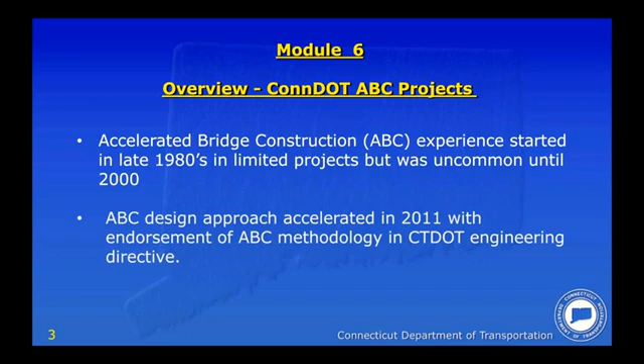So what have we done over these years for ABC project types, the quantities and types? This slide provides the data we've been able to put together. We may be off a little bit, but this is fairly close: a total of 138 projects to our best count.

And these are the project types. Prefabricated bridge elements / modular deck beams: 105 projects, which is 76% of our total ABC projects. Within this group we are also including concrete rigid frames, which may be over streams, as well as arches, and then modular deck beams.

Precast deck panels: 5 of the 138, and we'll talk about reasons why there aren't more of those. 13 projects with precast substructure components along with prefabricated bridge elements and modular deck beams. So these are 13 projects where your whole substructure, abutments, and wing walls are all precast, along with the spanning elements, whether it's a rigid frame or a modular deck beam.

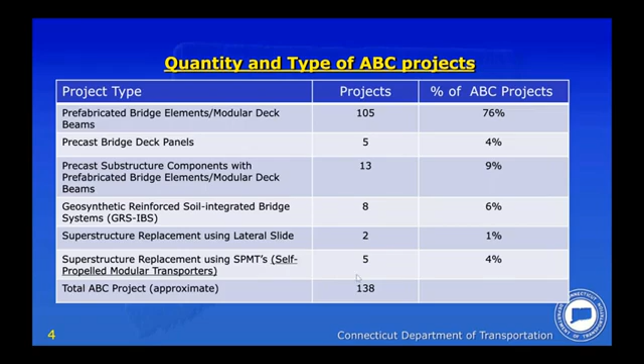One of those is being advertised right now, and the other one I'm going to speak to later in this module. There are also 5 SPMTs, where whole superstructures are moved into place either onto new substructure or existing substructure.

So, reasons for ABC use. In a master spreadsheet we compile to keep track of these projects, the number one reason for use of ABC is time savings in construction, and this is directly associated with cost savings with an ABC approach.

As we saw before, there can be significant cost savings in ABC projects as a result of reduction in overhead on the part of the state and its consultant inspectors.

Other reasons are avoiding complicated and staged construction conditions that can be avoided oftentimes with full shutdowns, and the safety improvements that go with that for work zone safety. And then lastly, the overall reduction in traffic impacts to the traveling public.

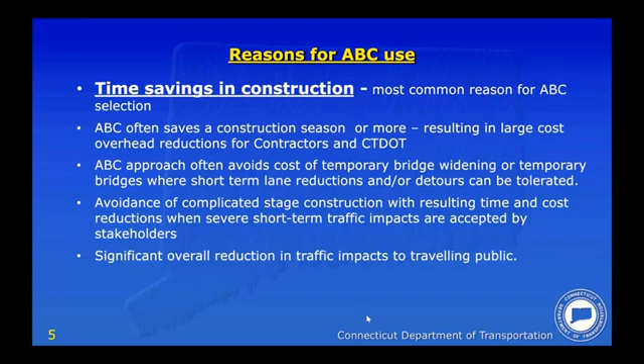I can't think of one ABC job that we put out where we had complaints back from the public over what might be fairly significant but short-term traffic impacts. The overwhelming response to our projects is appreciation that we're able to get in and get out so quickly. So those short-term disruptions with long detours are, for them, a small price to pay for a much lesser presence on the ground than some of the conventional bridge projects we've put out in the past.

So why do we have 76% modular deck beams or rigid frames as our ABC projects? I'm listing mine here in these bullets that you can see on the screen. Typically, it's due to a more cost-effective approach in replacing the entire superstructure versus redecking a bridge.

Often the bridges we're looking at in these projects are 50 to 60 years of age. They're steel deck girder spans, often with serious corrosion and poor paint, and they're in the 40 to 80 foot span range, which makes placement of modular deck beams very cost effective.

Going back to the service condition of these present superstructures, it's often more cost effective to replace the entire superstructure than it is to undertake the steel repairs that are often needed, along with painting the bridge at the completion of, say, a deck replacement. So that's basically why we've evolved in that direction, finding that replacement of the entire superstructure is more cost effective. We do life cycle cost analysis that also bears that out.

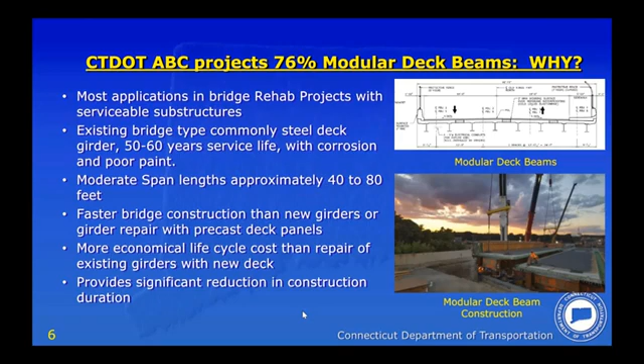So right now I'm going to just go over 3 examples. Mike has presented 2 examples here. Actually, Mike presented our deck replacement using precast deck panels in our Waterbury and Seymour projects, and we have seen also another deck replacement in our Waterford crossing of 395 over Route 85, and GRS-IBS bridge substructure construction in conjunction with a standard superstructure installation.

So this one here is a PBE, a modular deck beam example. This is State Project 35194, Old Kings Highway North over I-95 in Darien. The original bridge was constructed in 1952, and the bridge project here was to be a rehabilitation.

Through a study of the bridge condition and alternatives, it was determined that the deck needed to be replaced in any case, but the bridge had undergone a number of bridge hits because of substandard vertical clearance, and also had a very poor paint system.

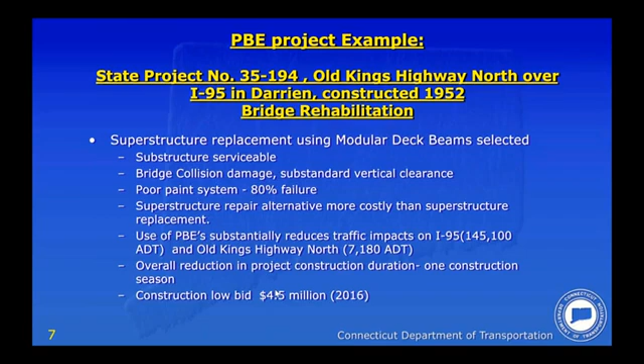So it was decided that bridge replacement would be the most advantageous solution here. PBEs were looked at using the earlier pilot ABC decision matrix, and it was found that PBEs was the optimal ABC approach to use in replacing the superstructure of this bridge. It turned out this bridge could be replaced in one construction season, the superstructure that is.

So this is a plan view looking at the proposed bridge over I-95 at this location of about 145,000 ADT of traffic.

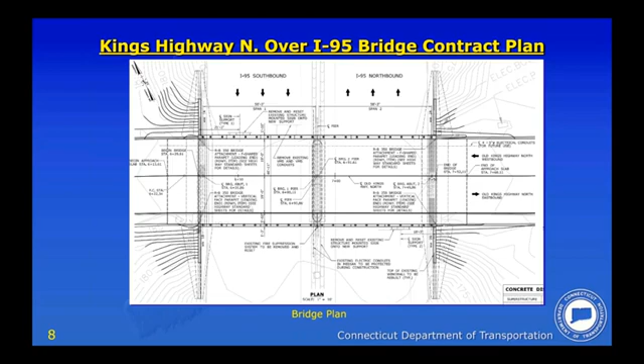Bridge south elevation looking here. You'll see the new superstructure. The substructure was stepped up to be able to raise the superstructure with a shallower superstructure to achieve design vertical clearance, AASHTO compliant vertical clearance.

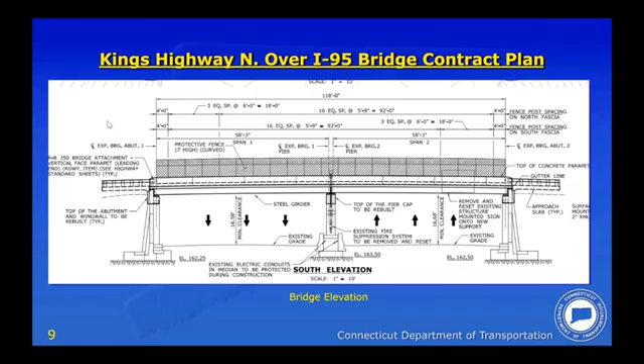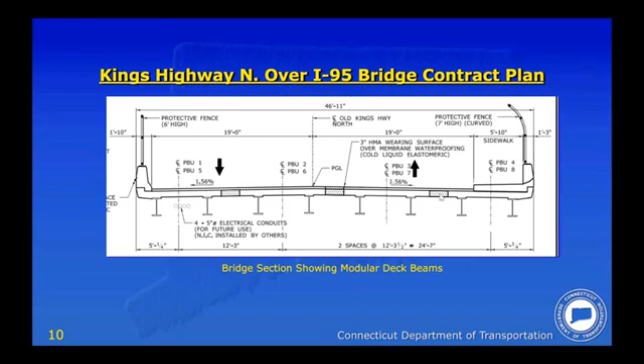Bridge cross section showing modular deck beam. You see the closure pours between the various segments here, the two girder segments. And a plan elevation showing the closure pours and the link slab construction over the center pier.

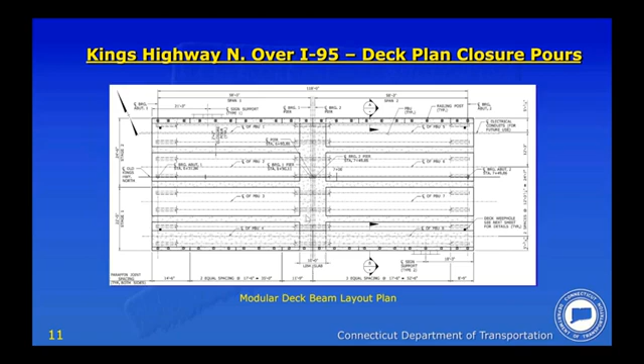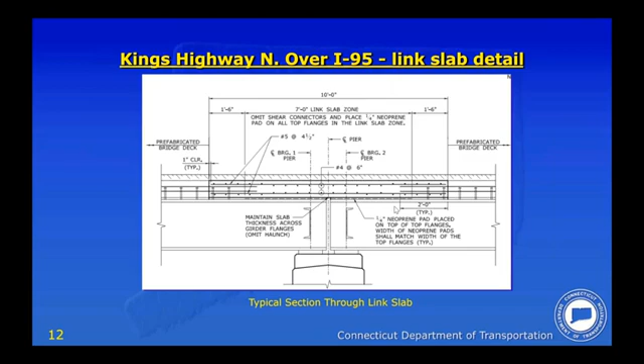Cross section of the link slab construction. So this obviously was cast after the spans were all fully dropped in place. And the erection plan showing the placement of cranes during the erection of the superstructures.

These PBEs, or modular deck beams, I'll say that these were all done during Sunday night closures, from about 10 o'clock on a Sunday night to 6 a.m. Monday morning. I believe there were 4 of these closures of Old Kings Highway allowed to make this happen.

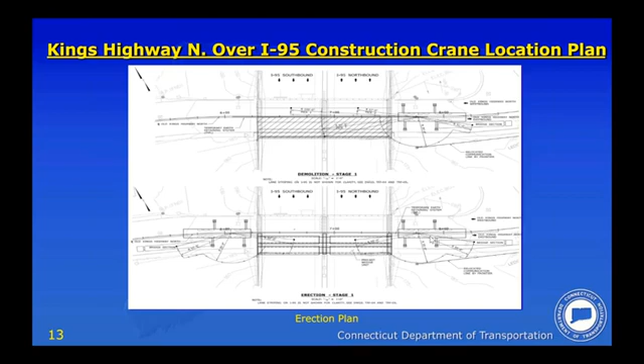Bridge 37, Route 1 over I-95 in Stamford. This was originally to have been a deck replacement project. This had been on our books for a long time.

Unfortunately, it would have required 5 stages of construction to accomplish a deck replacement over a multi-year period due to the very high traffic demands on this 4-lane span across I-95 in Stamford, which also includes a turning lane. That duration, with the traffic impacts, presented an unacceptable proposal to the town.

And this project was dormant for a little while for several years while the department worked on what to do, how to go about replacing this bridge deck.

But with the success of SPMT methodology that we saw elsewhere, and one of our own success stories that took place in Southington on Marion Avenue over I-84, it inspired our designers to look at using SPMTs to replace the entire superstructure, not just the deck, even though the steel was actually in pretty good shape in this project. SPMTs opened the opportunity to deal with this project in a much more expeditious way.

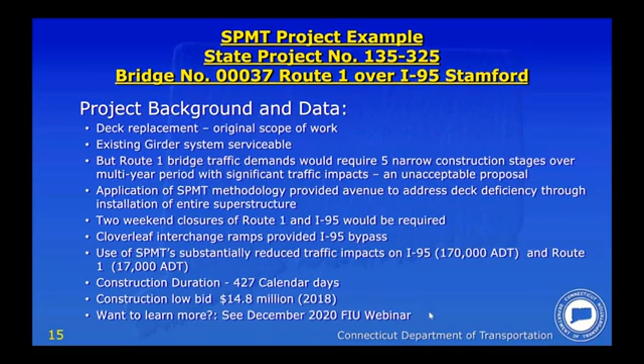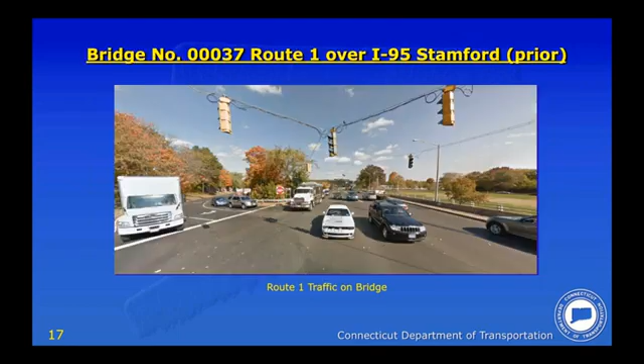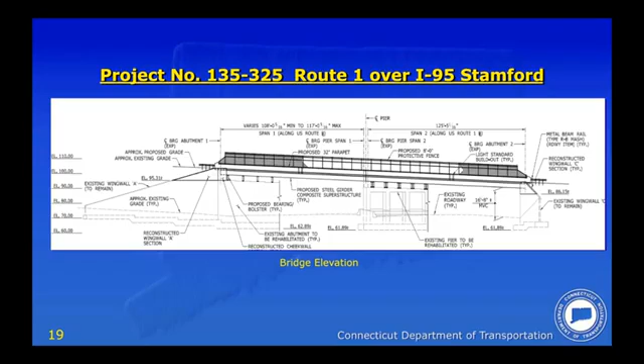A two-span bridge with a highly skewed 125-foot span 2, and span 1 ranging between 108 and 117 feet, and a cross section of the new bridge.

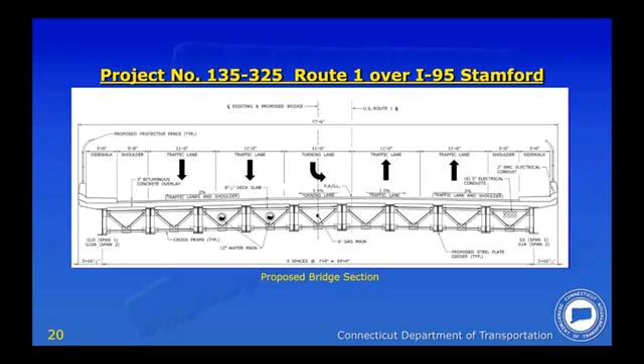Utilities obviously were taken out of service during the bridge moves. That's actually an element that comes into play in our ABC decision matrix, because that could be a showstopper in an ABC project if there's a major delay in shifting during construction, if utilities need to be accommodated.

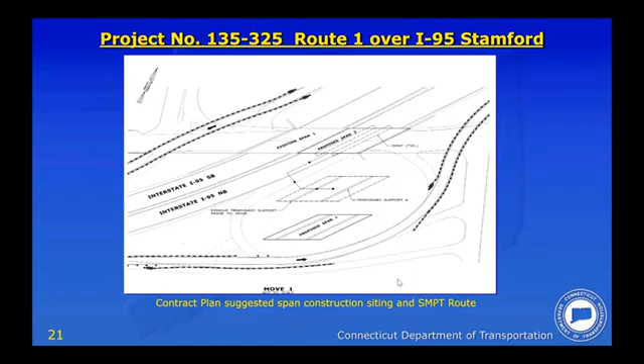During the time period that the span was actually moved into place, Route 1 was shut down. This occurred during two weekend moves. This is a shot showing the construction of the spans.

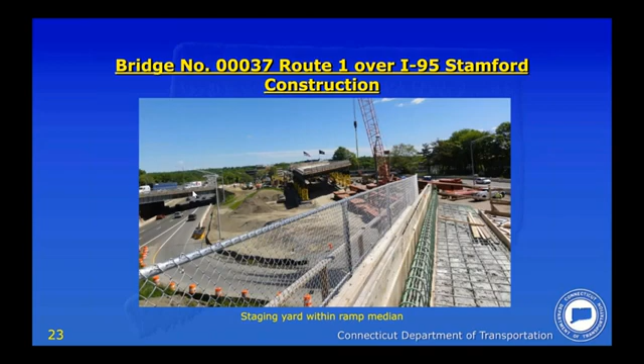Construction of the spans here before they were picked up by the SPMTs. This is span 1 that would be going into a location to the left of what you can't see on the screen, and this is span 2 that would be installed running down the highway ramp and onto the interstate highway that was prepared to receive the SPMT machines.

Here you can see span 2 being rolled into place. One of the lessons learned here is to make sure steel plates are used wherever possible during final positioning of the bridge, so the turning wheels do not settle into pervious backfill. There was a little difficulty with the final alignment of the bridge because of that reason.

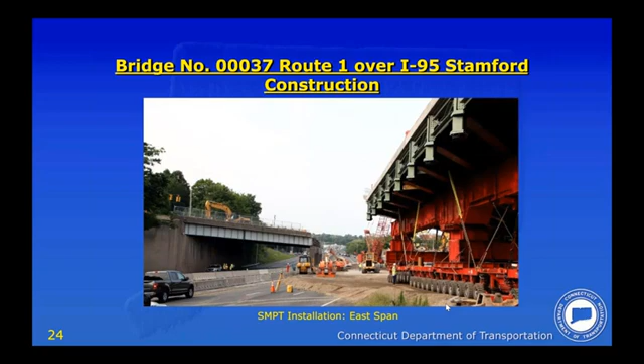The skew condition of the bridge here actually did pose some challenges during its installation, but things went on schedule, and the contractor did meet his scheduled deadlines, avoiding any disincentives and collecting incentives.

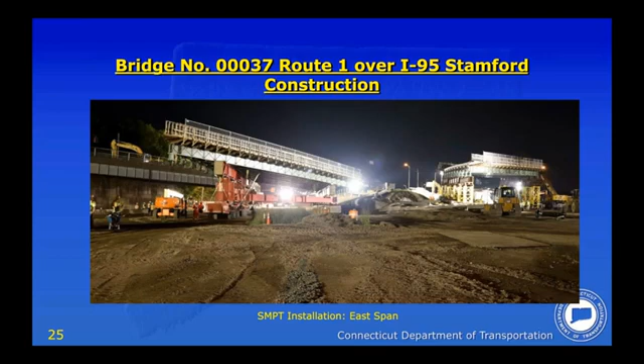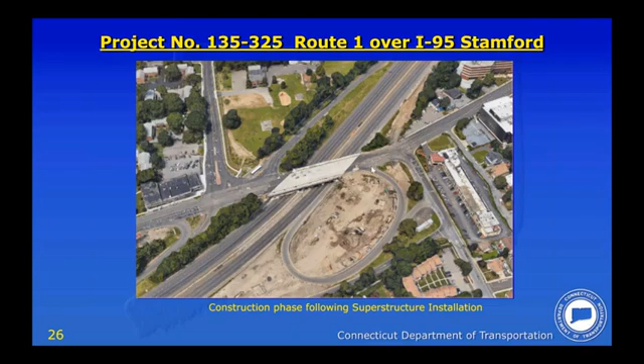An aerial shot showing the completed superstructure in place. The temporary ramp that was installed here has now been removed, and we're back to traffic on Route 1 and 95.

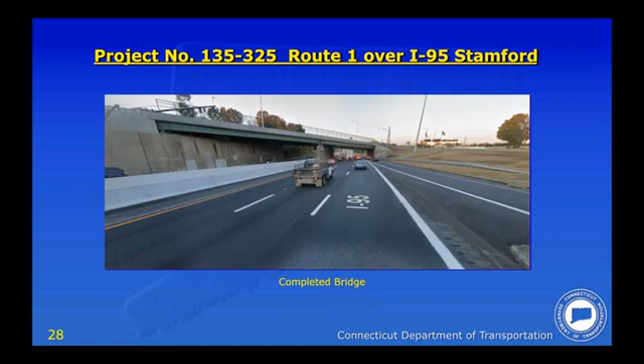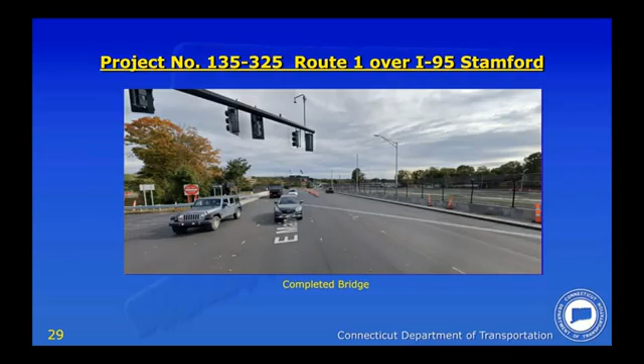The next project I want to discuss is a lateral slide project that we did. This project was bid in 2015. It's a very short span, originally constructed in 1958, Bridge 352A and B, I-95 over Oil Mill Road in Waterford.

This bridge originally required a deck replacement as a minimum. It was a very narrow deck with substandard left and right shoulders. Several options were looked at using precast deck panels, but because of traffic conditions, all options—the precast deck panel option or even casting in place—would require temporary widening for the duration it would take to accomplish the deck replacement.

So we looked at basically a lateral slide method to try to reduce that duration, where we would in this case be taking Route 95 down to one lane.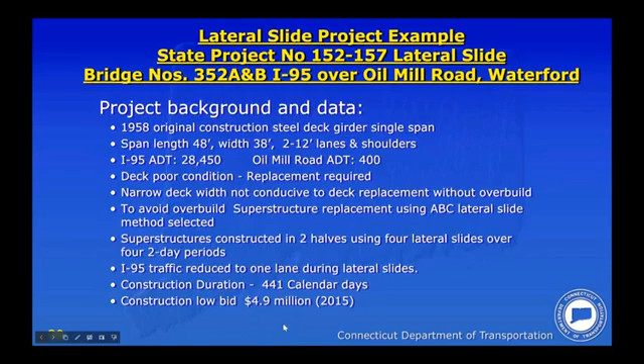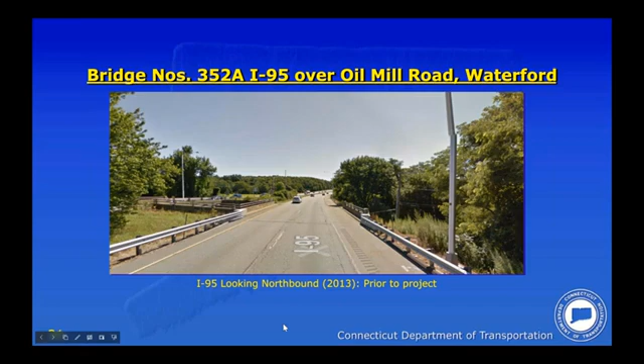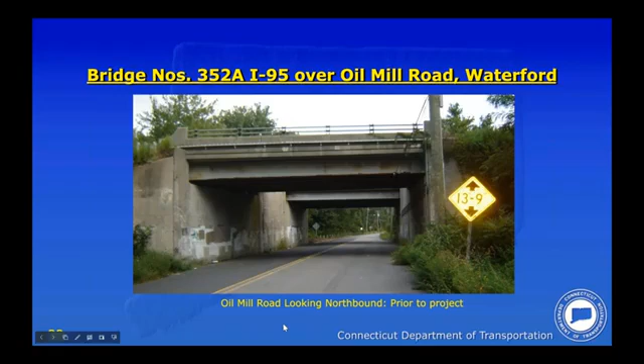This is an existing photo of the bridge looking northbound prior to the job, and an elevation of the bridge looking northbound on Oil Mill Road. Both spans would be replaced in this project. So here's a plan and elevation view of the northbound bridge, and similar for the southbound bridge.

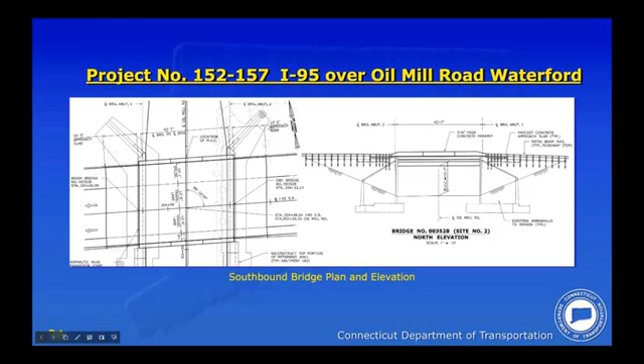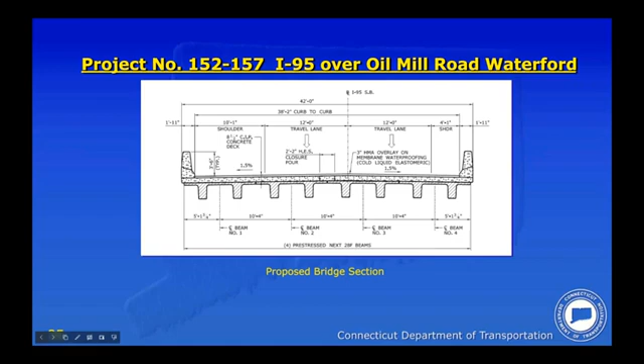The selected superstructure alternative was next beams type F, with a full deck that would be cast on top of the next beams in their fabrication location. This shows where the erection of the superstructures was taking place.

Each bridge would have two halves that would be slid in over a weekend period—actually, each slide took place over 34 hours. We're looking at stage one construction here, where the left lane is replaced first, and the next stage, where the right lane is then replaced with a superstructure constructed just to the south of the existing bridge.

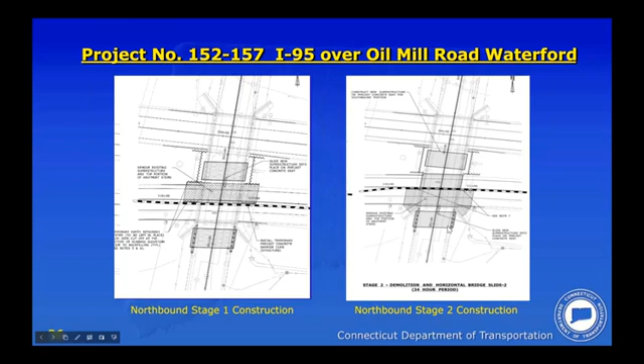So we're looking here at the demolition for stage one and the horizontal bridge slide for stage one, followed by schematics and preparation for the stage two construction.

Traffic now on the stage one construction. The existing right lane is now demolished in place, and the stage two slide takes place. You'll see we had median barriers put out here to protect traffic during those traffic movements when the drop-off condition was here.

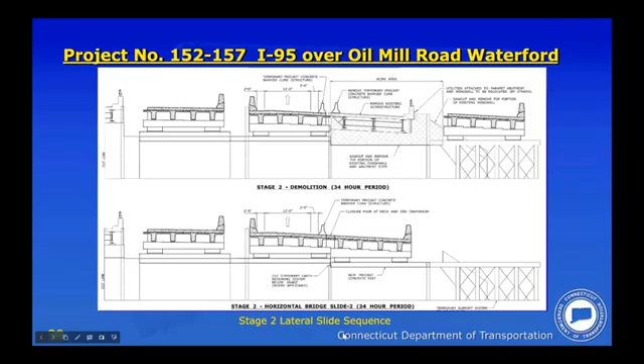Those are temporary barrier curbs bolted to the bridge decks. And a detail here for the closure pour between the two halves.

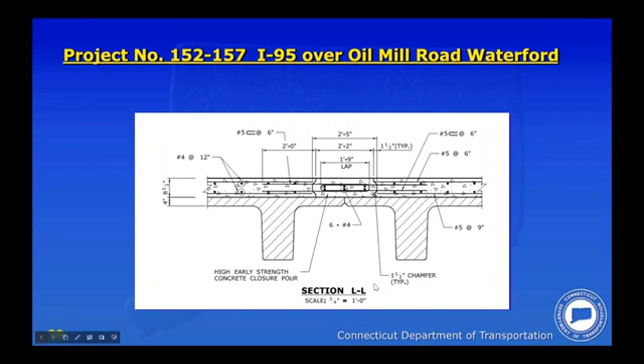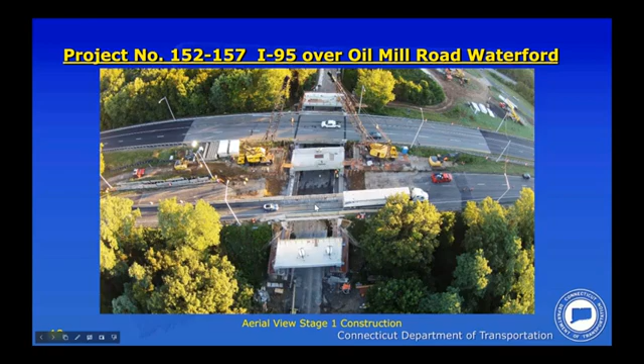So looking at the stage two span, this is the right lane for the northbound bridge being ready to slide from its construction staging false work.

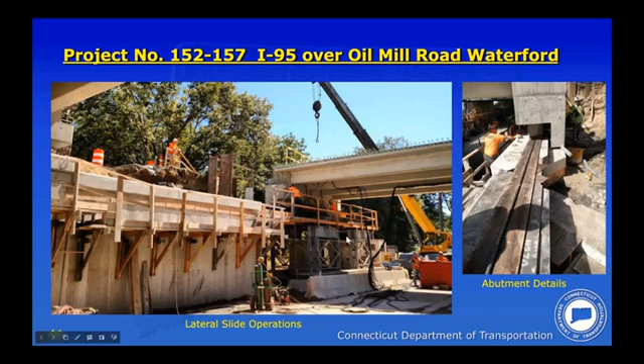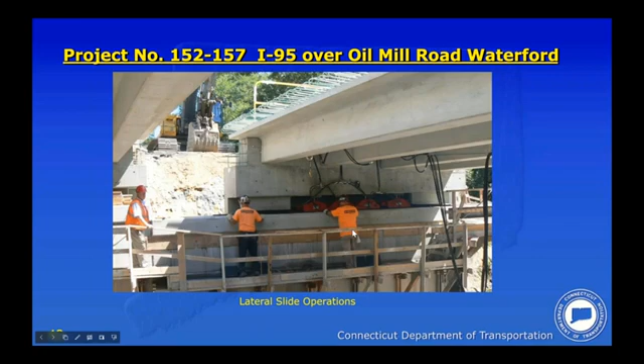And the span, stage 2 right lane, midway through its lateral slide to its final location. And the final resting here for the stage 2 lateral slide.

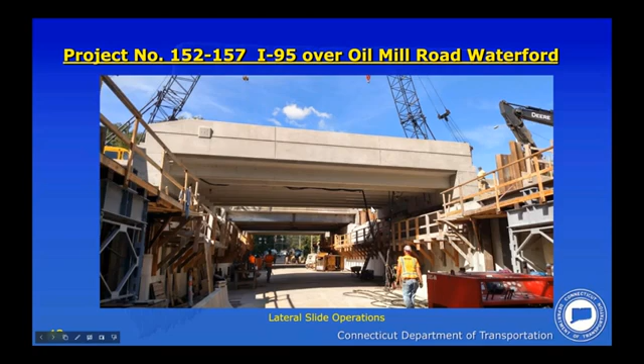Now both spans are being prepared now for the closure pours between the segments. And a view of the completed bridge, looking northbound on Route 95. Elevation of looking from Oil Mill Road.

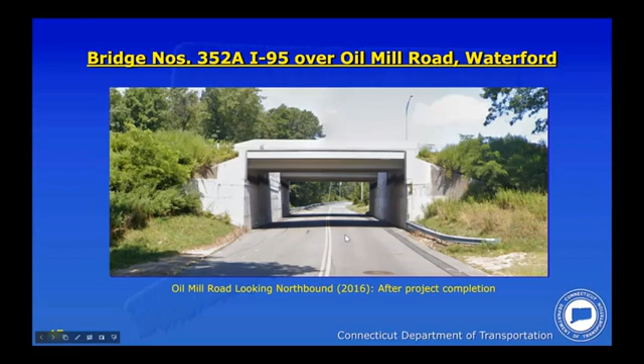But I'd like to just summarize our experience here with ABC. I think our early work in the 1990s proved the effectiveness of ABC.

It took a little while for the department to get fully on board with that, but by the mid-2000s there was a lot of interest in additional projects under design at that time. I think 2011 was really a turning point for us when we endorsed ABC as a recommended construction methodology, asking our designers to look seriously at that in all their projects for deck replacement, superstructure replacement, and full bridge replacement.

Several years later, with the issuing of our ABC decision matrix, we were able to provide more objective analysis methods for assessing the viability of ABC on any given bridge project. Before that, frankly, it was a little difficult to make those decisions. Sometimes they were made because there was no other viable alternative based on our engineering judgment. But the matrix now has provided that tool that we did not have before.

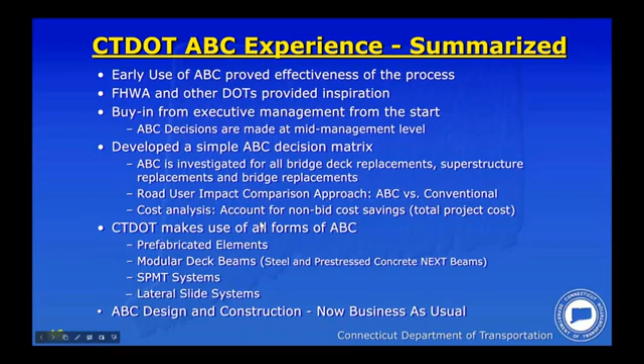With that, the presentation is complete, and I'd be willing to accept any questions.